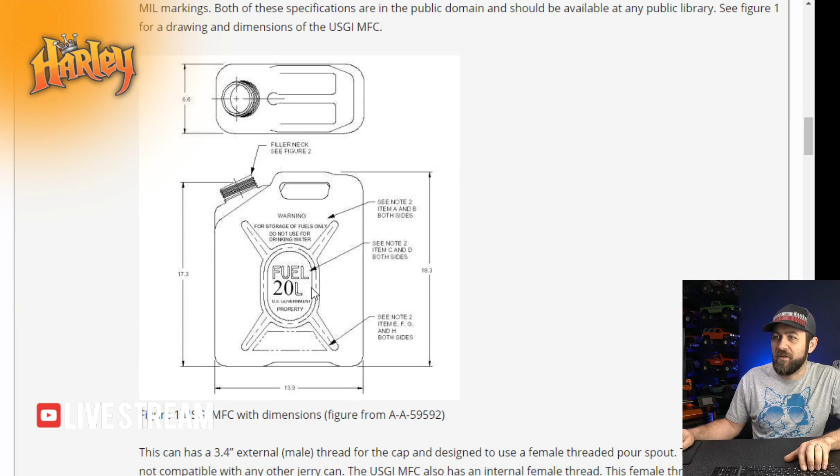So we're going to go to our page here - first, let's make you look at the web page, and let's go find us some jerry can specs. So, jerry can NATO dimensions - let's look something up. There's one straight off of Amazon. Here's some - perfect, that's the picture we need right there. Survival monkey - perfect, that is the perfect picture. Let's zoom into that - that is what I'm looking for.

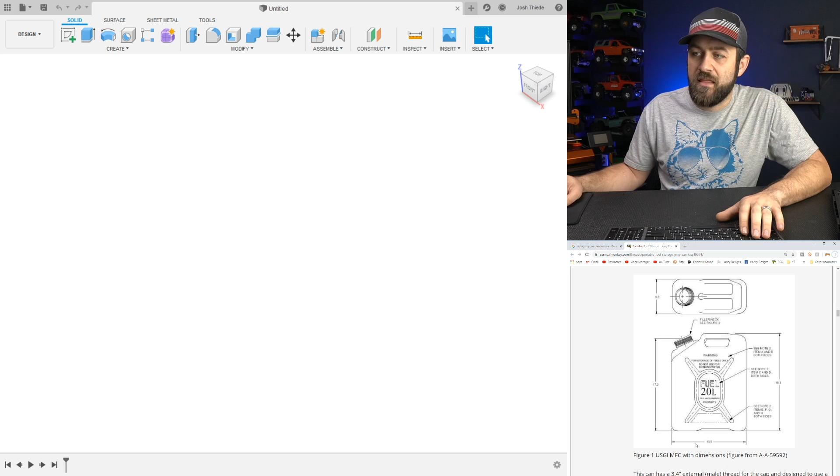Let's take a look at some of these dimensions, and I think that will do. We'll draw our rectangle first. It's 18.3 inches and 13.9, so we're going to start a square, or a rectangle at least.

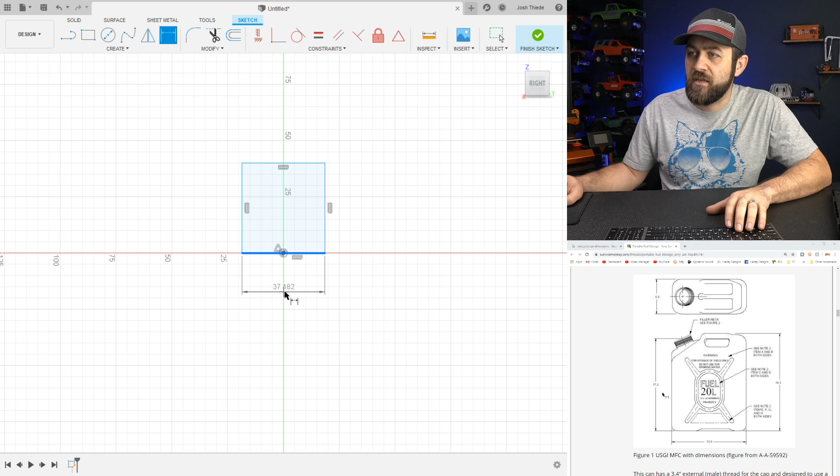I'm going to do this at 1/9 scale, just because. I'm just going to constrain the bottom edge to a center point so I know I'm in the right ballpark. 13.9 was the bottom dimension. We'll hit D for dimension. I'm working in millimeters here, but we'll go 13.9 inches, and divide that by 9 right in the CAD program. That way it does the math for us on the scale.

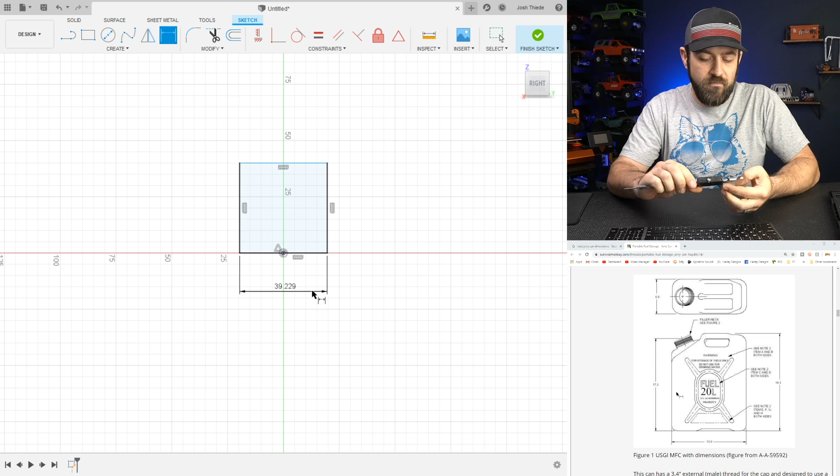That seems large still. 13.9 inches divided by 9, 39 millimeters. That seems like a really large jerry can. I'm not interested in having a jerry can that large. Let's draw this - 13 point, man, that just seems like a big jerry can.

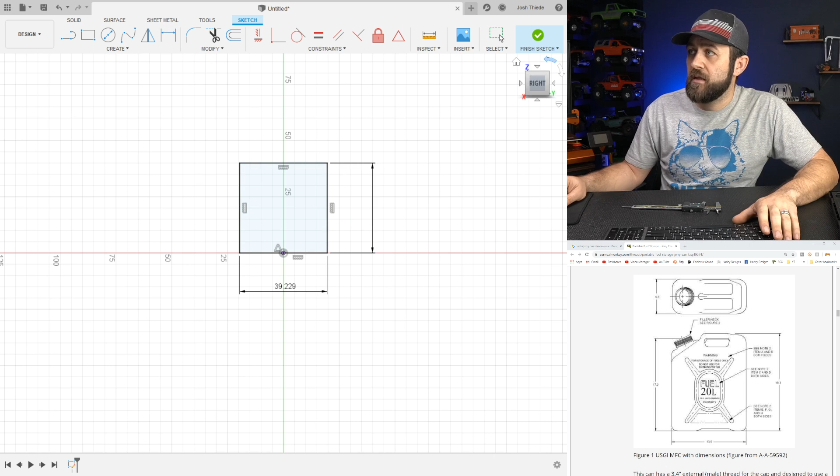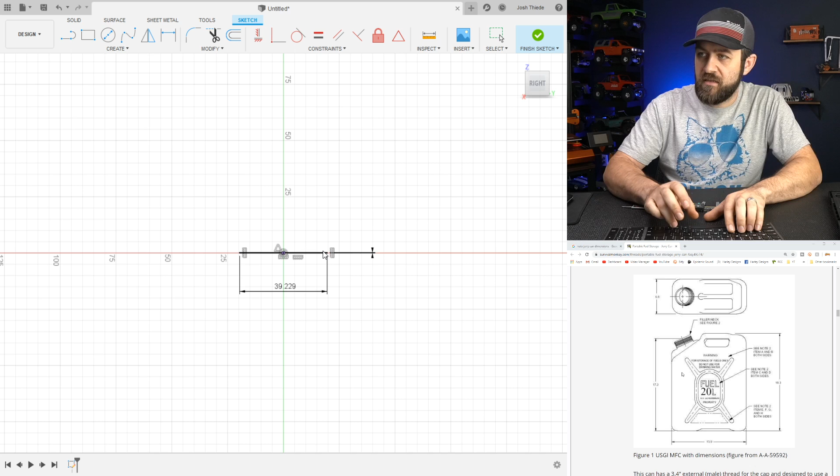We're going to use this for dimension at least. Being that this is a scale accessory, we can draw it to scale, and then modify it with the scale tool later, which is a good tool to use anyway. Then the height is 18.3 inches, and we'll divide that by 9 right in CAD. Oh, divided by 9 feet somehow. 18.3 inches divided by 9. There we go.

Yeah, 1/10 scale, like most of our stuff isn't 1/10 scale. I could do it in 1/10 if we wanted, just to see what the difference would be. Most of our trucks are closer to 1/10 scale, or 1/9 scale than 1/10, but we're still a little big.

Philip Bender says, I have a couple of jerry cans, they measure 39 millimeters also. And that's why. I'm just going to keep looking at the comments for a minute until everything catches up, because it's showing me that.

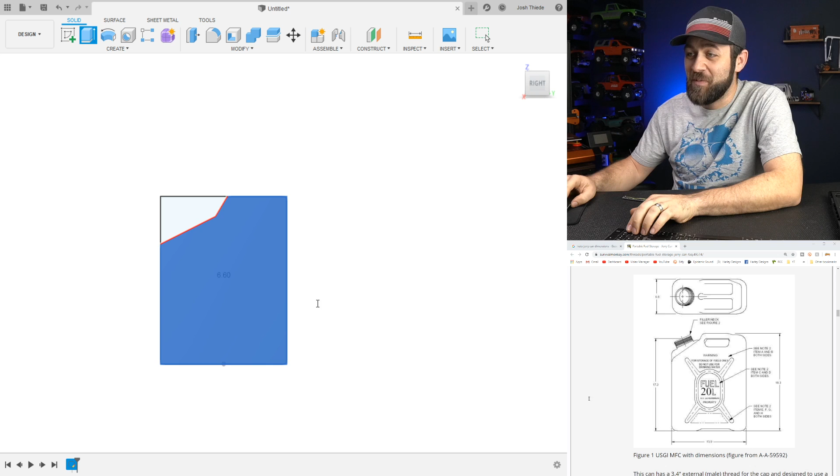We're working on it. It's like, I can work on an RC car in front of people just fine. Sometimes you get, even though I feel fine while I'm drawing normally, starting to do something like this in front of people feels a little different.

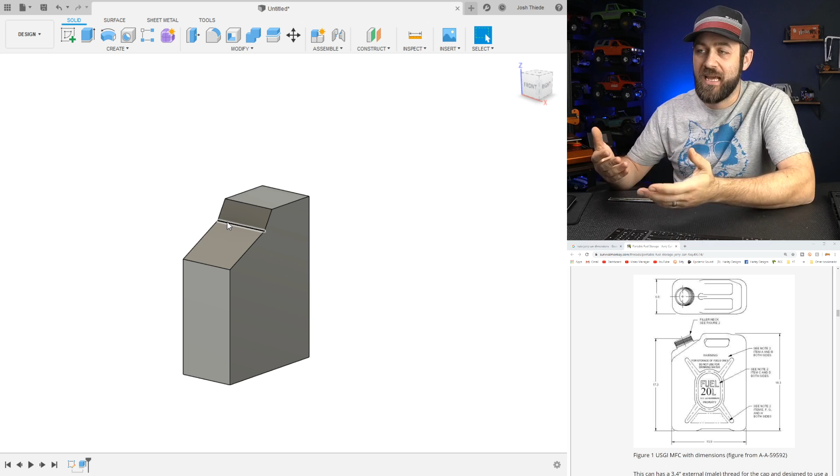So I just put in 6.6 divided by 11, and I forgot to put in inches. Now it just did 6.6 millimeters. 6.6 inches divided by 11. So now it gave us the appropriate overall proportions to this thing. The height, width, depth of everything should be appropriate to a jerry can.

I'm going to just keep kind of referring back to it. The other thing is that a lot of the jerry cans seem to have a different style handle than what the NATO ones have with the 3 handles. So we're going to try and go for that specifically when we do this one.

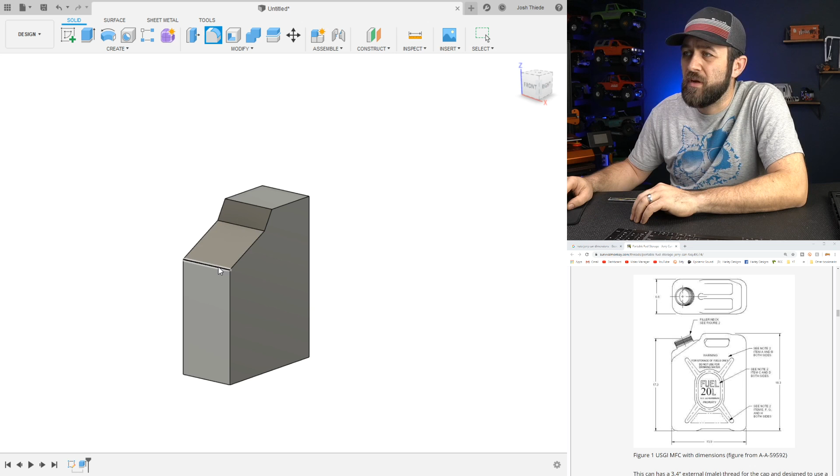So let's put on some of our radiuses at this point even, just to get a feel for it, to see if it's going to start looking how we want.

I'm going around and selecting all of the areas that I want the radius to be on. With Fusion, you can actually just drag, and obviously that's a little sensitive, so you can type it in - 3 millimeter, 4 millimeter. Let's go with a 3mm radius.

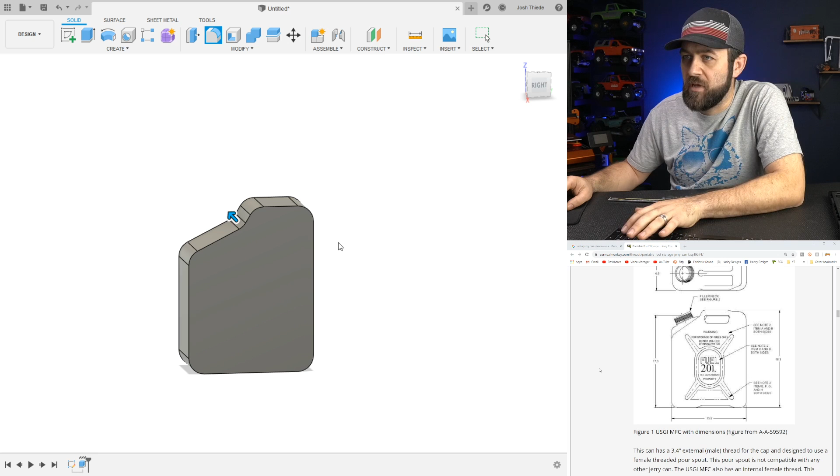And then we'll go ahead and throw that same - that looks a little much on the outside edges to do a 3mm. We'll do a 2mm radius around the outside edges.

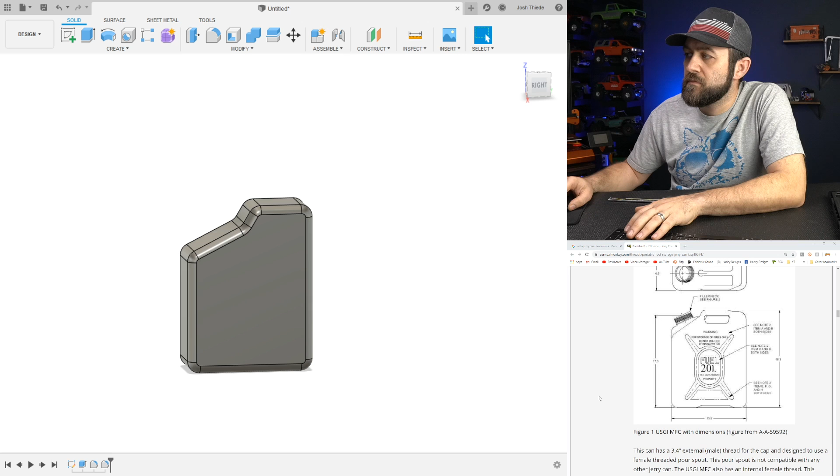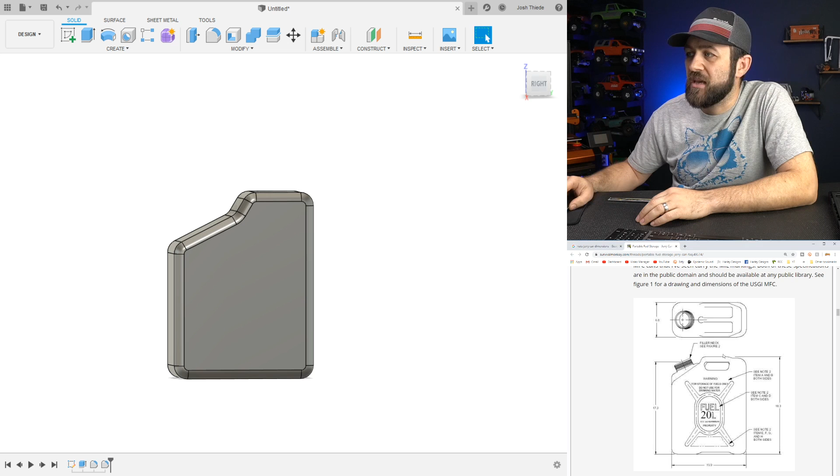So now we have a generic block that has a reasonable start to the style of our design. This is something we could definitely refine, especially around the handles. That stuff almost feels like it could be a little sharp or a little too rounded, but let's just keep this pretty high level and not get crazy worried about every part of it. Again, this is more just about taking an item that you want.

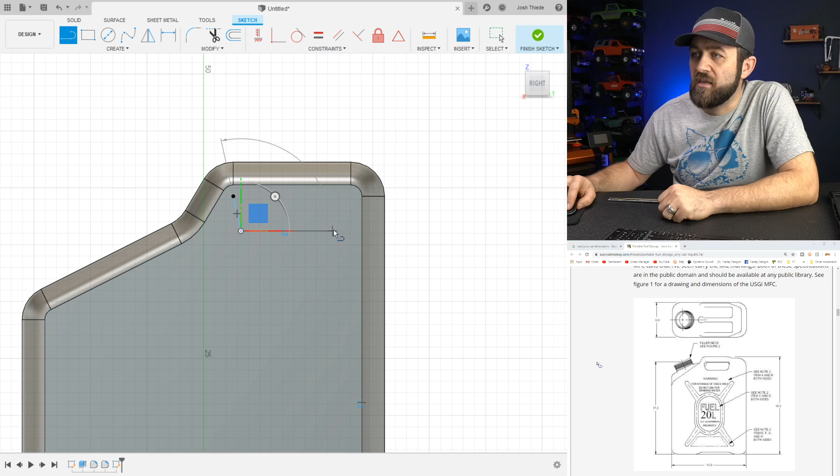We're gonna break it down into shapes, and maybe it'll give you guys something to think about when you're trying to tackle a project.

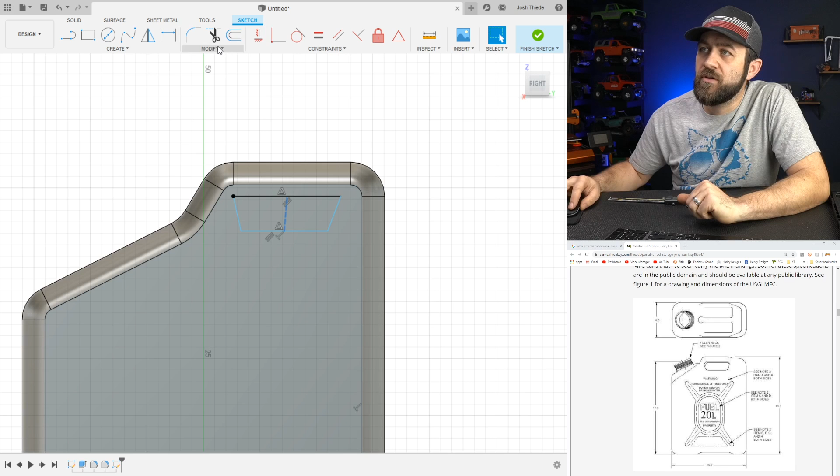So I just drew a general shape of a handle, not off of any dimensions, just kind of throwing lines out there.

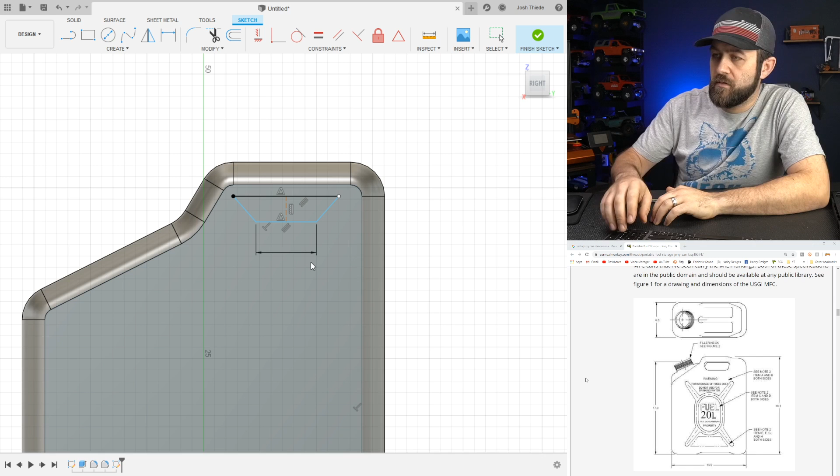So let's do - we're going to make it a 3mm gap in between the handle areas. I need to set the width of this handle still - nine millimeters. It's a little wide, 8.

Going back and forth looking at the photo. I've got the photo up on your guys' screen, but I have to kind of go back and forth for now at least.

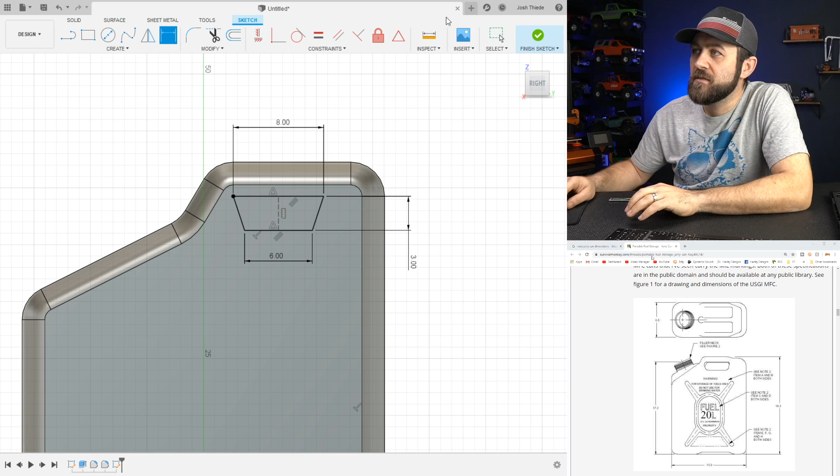So we're going to select that profile we drew and rotate around just so we can see. We're just going to drag it through as a cut. You can set an actual depth, or you can just drag through, whatever you like.

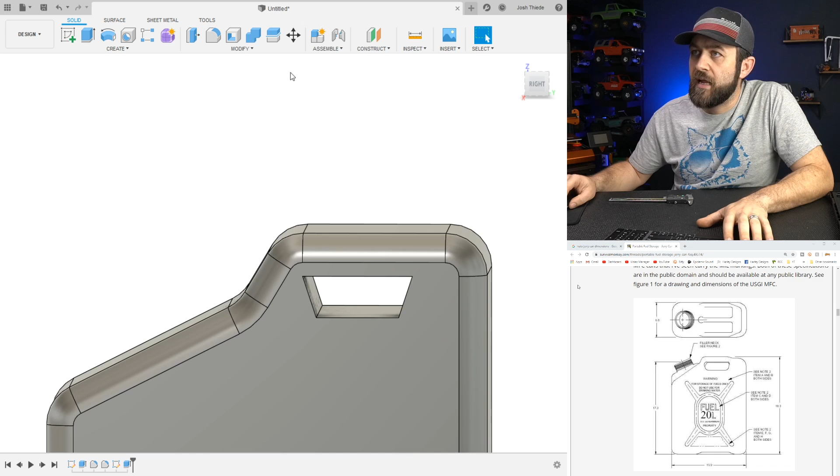That'll give us our first cut. While we're at it, we'll go back in and add in some small radii to the inside of the handle.

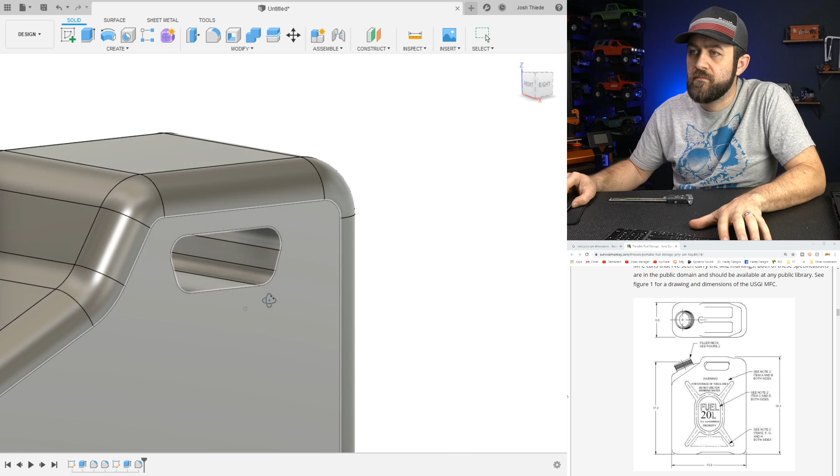Aren't you done yet? I'm ready to print this already. Thanks, Matt. Thank you for that.

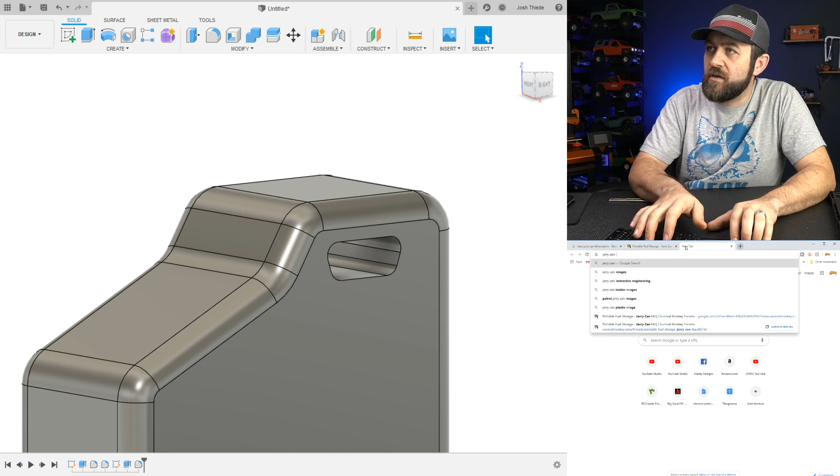So while we're at it, I'm just going to pull up some images. Jerry can, yeah, images, sure.

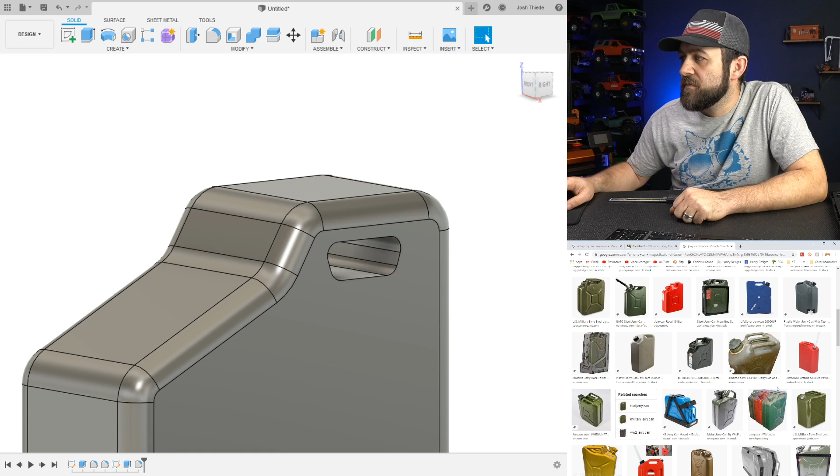Obviously some of these are different styles—the metal ones with almost like a welded-on handle at the top. That's where we're seeing the different styles. Some are molded with a single handle, some are molded with 3 handles. For some reason I like the 3 handle style, so let's do that.

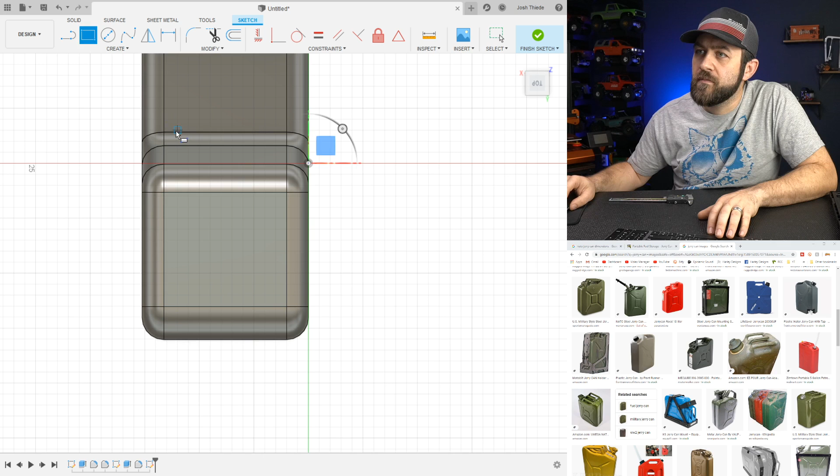Let's make a cut now. I selected the very top of the jerry can. The snaps on Fusion are very odd to me, coming from some of the other programs that I've drafted in. Sometimes it wants to snap to just the oddest places.

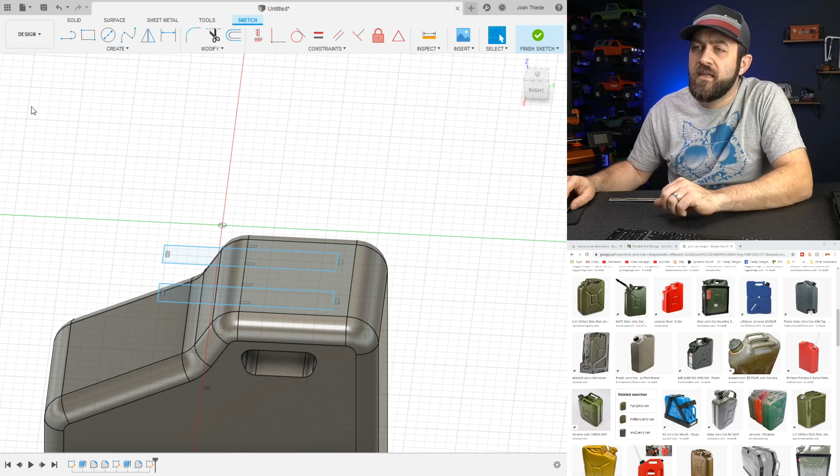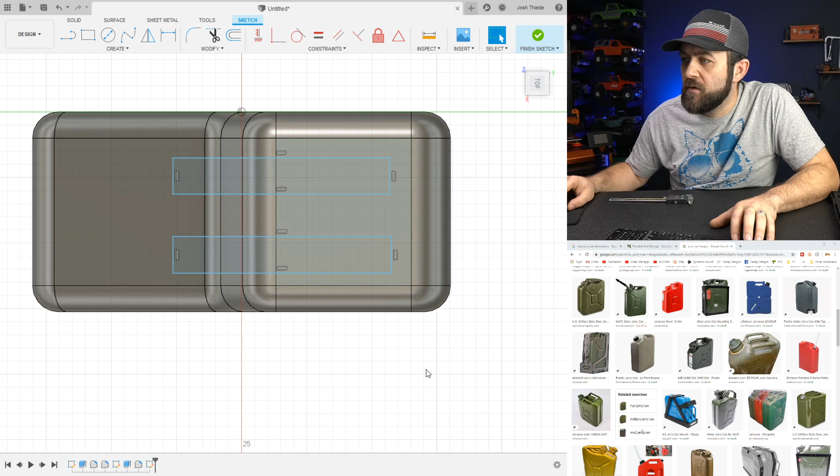And let's see. What I would like to do is change the view style on this to a wireframe style—shaded with hidden edges, that's what I'm looking for.

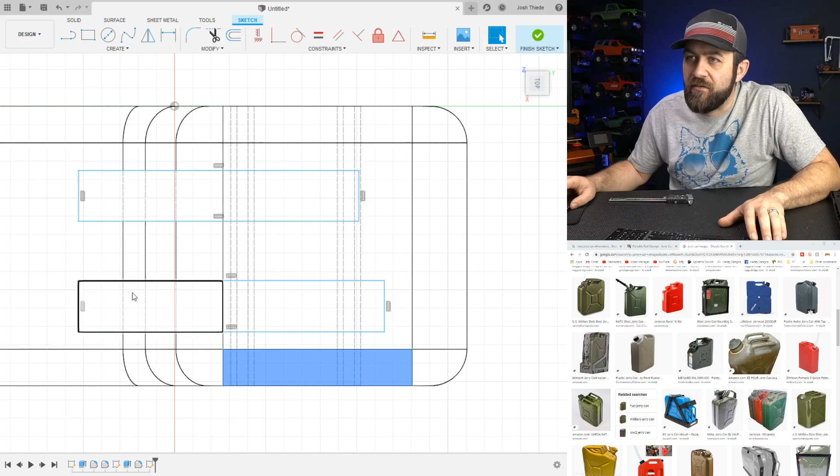Well, actually, can I just—I want to be able to... wish it would let me select those edges. This is just the difference from one program to the next sometimes, and where I have a little bit of difficulty, especially when I'm not as familiar with Fusion 360 as I am with something like SolidWorks. But let's just work our way through it.

It's actually just, we're going to cut in a little bit deeper, and then we'll throw some fillets on it, just because.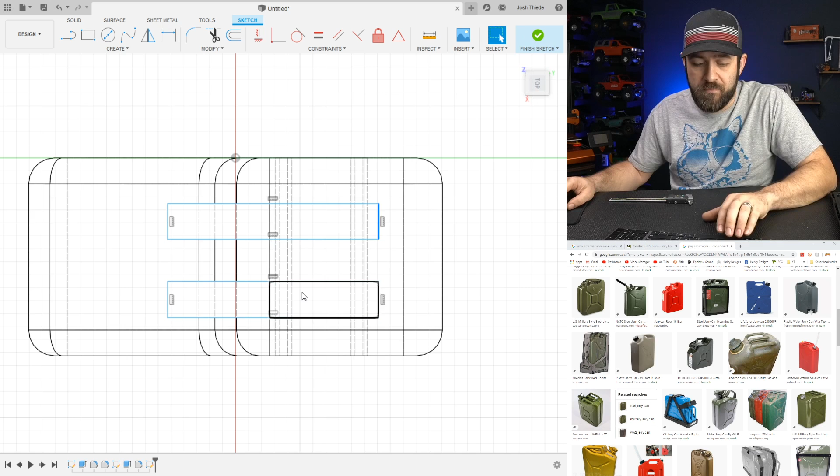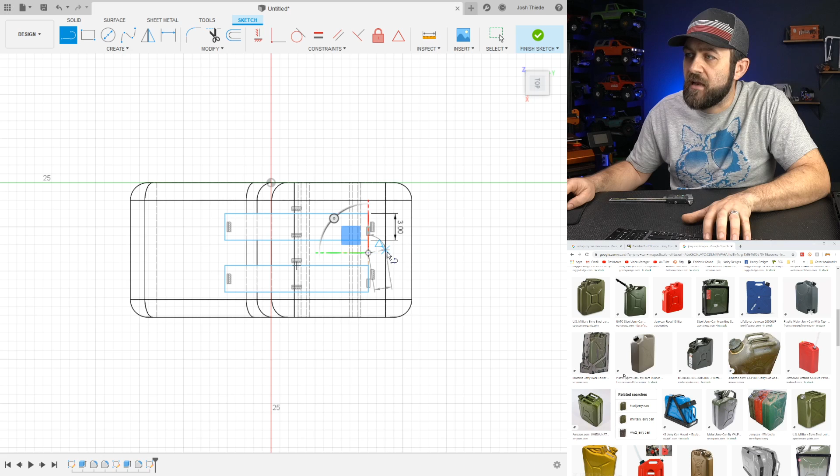We're going to make these cutouts that we're marking right now 3 millimeters wide. Then I'm going to put a construction line between them, and snap to a line next to it with some midpoint constraints so that I can make sure they're spaced in the middle. That way if I adjust one, they both adjust in and out.

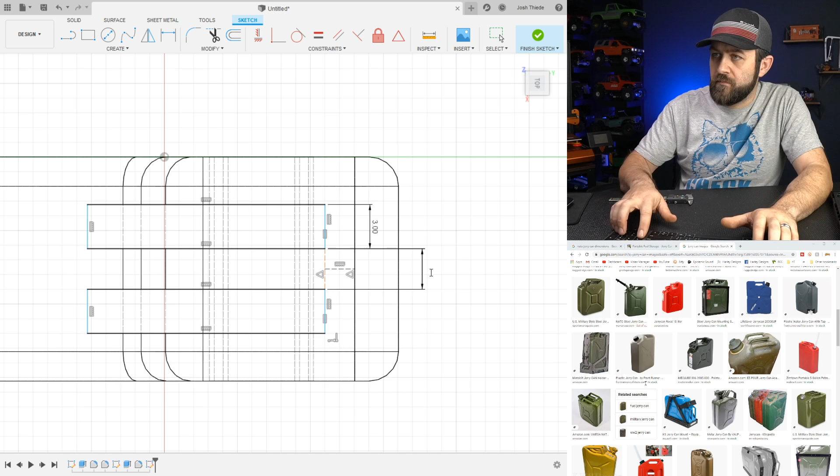Then we'll put 3 millimeters between them or so.

Let me go to the chat just to see how much of a hard time people are giving me.

Yes, I am making handles currently. I'm making the cuts out of the top. So I'm making these two rectangles and I'm going to cut them down through the item.

So just taking a general cut. Let me just show you now, and we can go back and look at it. We're going to go down—I'm going to just select this. When I selected the surface there, it just drags that cut down to an area.

So did that, and then you end up with a few handles. Again, very simple handles. We could get fancy and inset the outside ones in, and you can just keep going. It's all about how crazy you want it to look.

And I think later, when we get further and further into these projects—see, there's me hitting the button, but I noticed it right away. I'm gonna get better at these things.